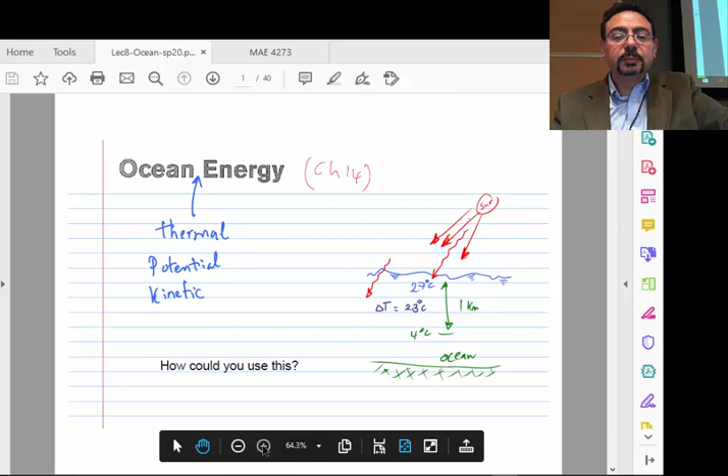So this is about ocean energy. The planet has a lot of oceans—it's a blue planet because of all the water that we got. And that ocean has three kinds of energy that we can harvest: thermal, potential, and kinetic energy. We'll see how people can use all those three to generate energy.

The problem with all those systems is the dollar per kilowatt hour. Those systems may be expensive unless you have special cases that make the price comparable to what you'd get from burning fuel.

So the first way is thermal. Where is the thermal coming from? It's coming from the fact that the sun is heating the top, and the bottom remains always cold because it's actually very dark too, since the radiation does not penetrate. As a result, you have a temperature difference. You don't have to go all the way to the bottom of the ocean to find this difference—within 1 kilometer, you could end up with a 27 to 4 degree difference.

So that's 23 degrees. As a mechanical engineer, anytime we see a temperature difference, what should we think about?

If I tell you the kitchen in our place is always very hot, like 80 degrees, and the rest of the restaurant is always like 65—so 85 in the kitchen and 65 in the rest—what should you do?

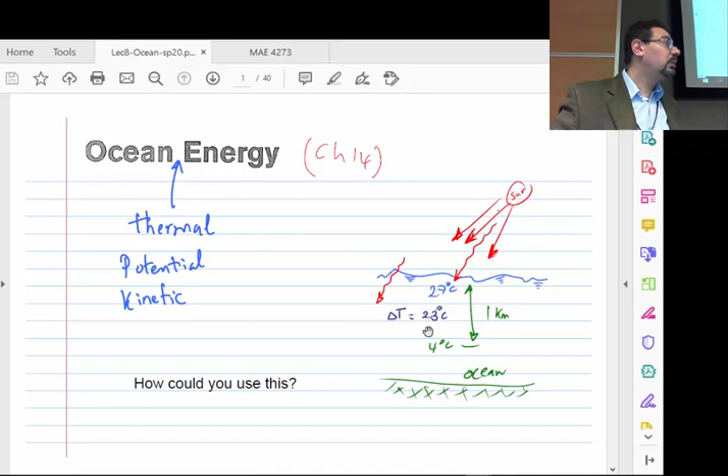If the ocean surface is 27 degrees hot and the bottom is 4 degrees, I could put a steam power plant in here, a Rankine cycle. This becomes basically ocean thermal energy conversion, OTEC. So in multiple choice, sometimes I'd ask, is this plant OTEC or a Rankine cycle—so you need to remember this acronym.

So now why does this sound like not really a great idea? You're like, no, I'm not gonna do this. Why does this sound unappealing? It's because the temperature difference is not much, and as a result, if you calculate the Rankine cycle versus the Carnot cycle—which is the best ever, we will never hit the Carnot cycle—that's 1 minus T cold over T hot. Based on the 20-degree difference we just calculated, that will end up being 7% maximum ever.

7% maximum ever—that's the Carnot cycle. So our cycle using the Rankine cycle will end up being what, 3%? That sounds horrible. But what is not horrible is that the 3% efficiency is running on free fuel, which is the sun, and it's always there.

Also what's nice is that there is a huge amount of water. This is not like just one pipeline of natural gas coming—no, you've got the whole ocean, so you can pull as much water per second as you want, as much hot water as you want. It will never finish. So if this thing is built on a really big scale, it can generate a lot of energy—yes, at 3%, but 3% of free energy.

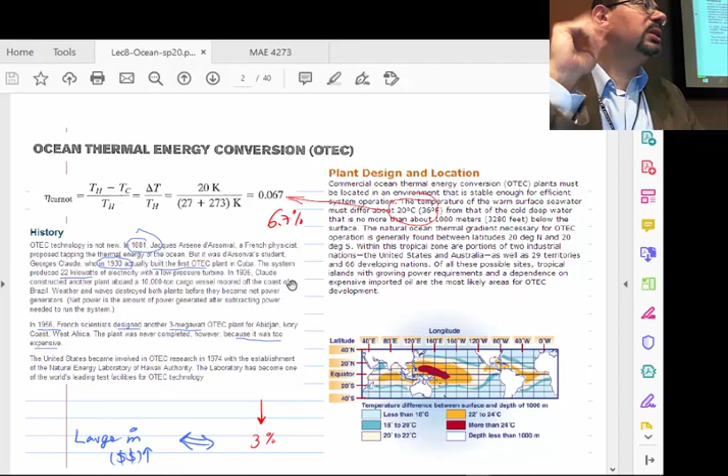So then the bottom line to judge this system is not the 3% efficiency. The bottom line is how cheap can we build such a system. Eventually, what is the dollar per kilowatt hour?

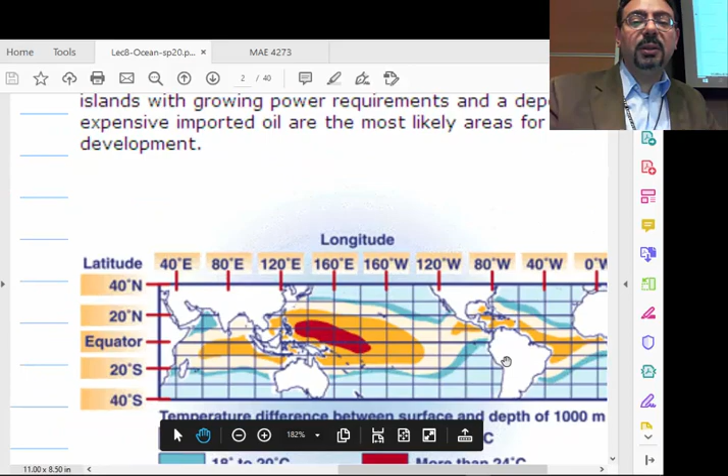Also, it requires 20 degrees C difference, and that doesn't happen everywhere. There are only a few places in the world where you will get that much difference, and you can see those places are near the equator, basically—because the sun is hottest there, so you can get that big difference. Those are more than 24 degrees C.

And that's why China contracted Lockheed Martin to run the calculation or the model for how they can build one of those stations near China, to harvest the energy. There was also an experimental one built in Africa by a French company.

Where's Africa? Over here.

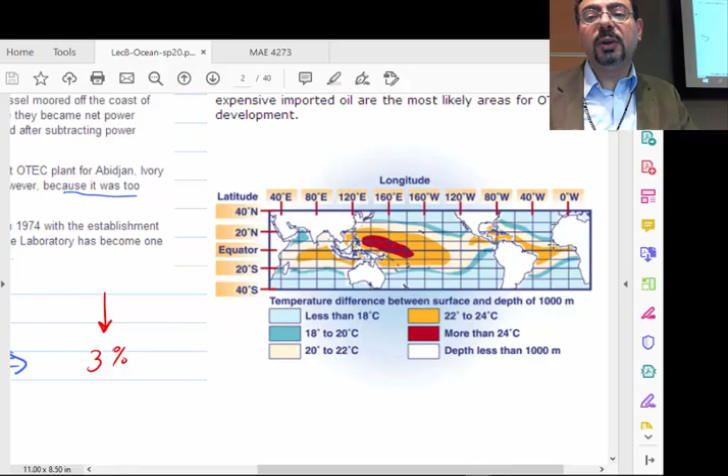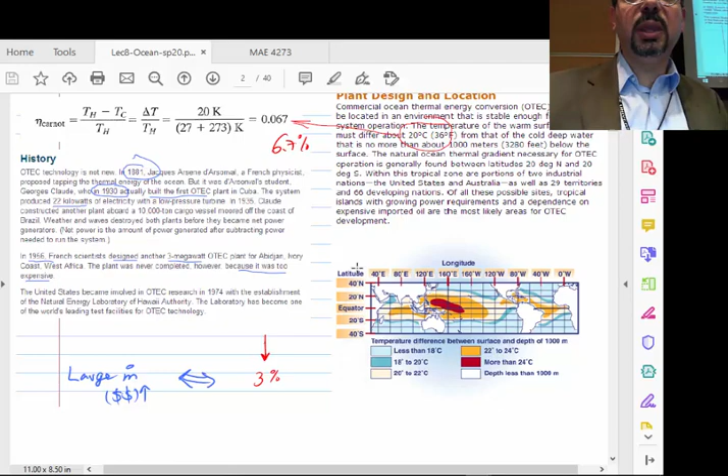So people are actually considering this seriously, right? But it's the cost per kilowatt hour, and also the fact that it's sitting in the ocean—you know how corrosive the water of the ocean is with all the salt—that makes the station basically live in very bad condition, which makes it short-lived.

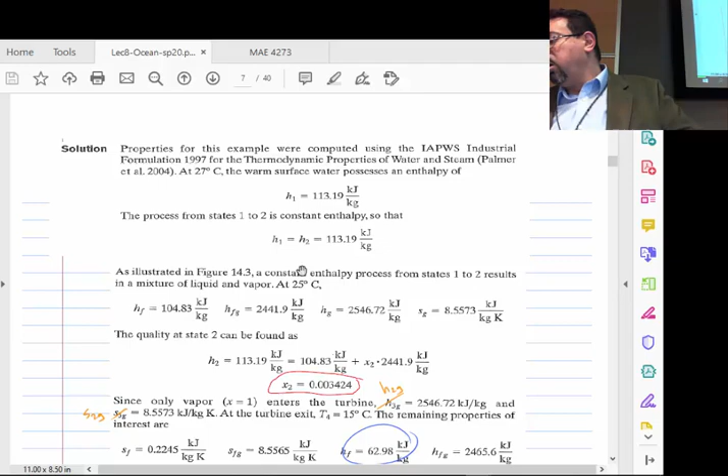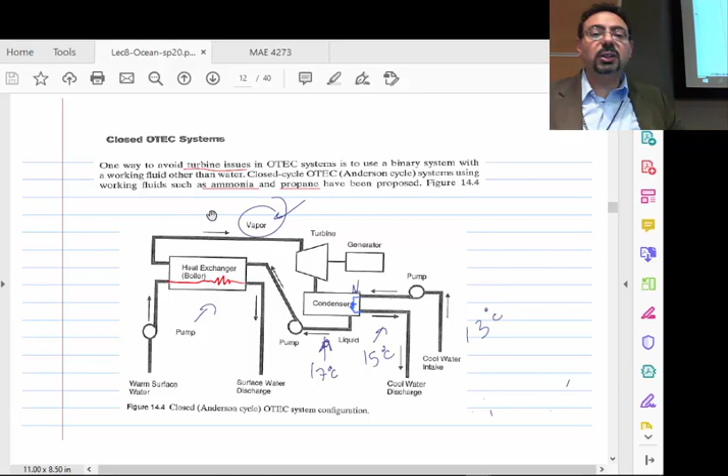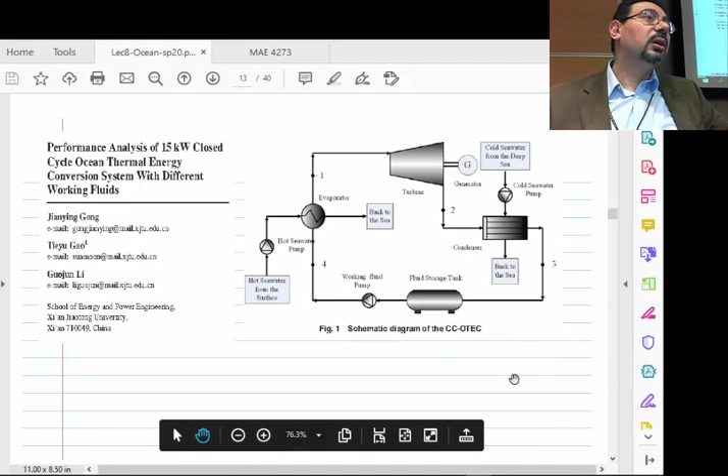What is a closed system? There is a working fluid here. That fluid could be propane, butane. There was a paper that said, if I want to build a 15 kilowatt closed system, what liquid should I use? It's not going to be steam, but it could be ammonia, butane, isobutane. They tried all those fluids, and for different pressures, they figured out the cycle efficiency.

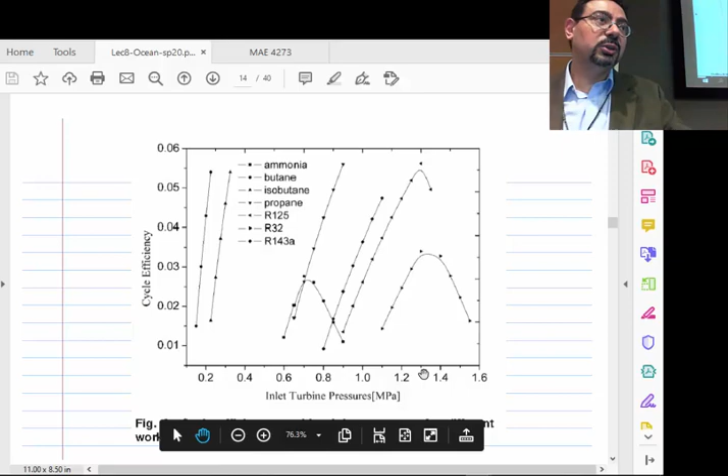You can see it's going from 1% to 5%. Yes, the temperature difference is small, but the point is that with different working fluids, you can run at different pressures. It would be nice to run at lower pressure rather than building things very heavy with big pipes to handle big pressure. So a closed system like this gives you the freedom to pick what thing I want to use—could be something toxic, since it doesn't really leave the system, I don't really care.

And so that Rankine cycle has a boiler, a turbine, a condenser, and a pump—that's the basic Rankine cycle, right? Does anyone remember the Rankine cycle?

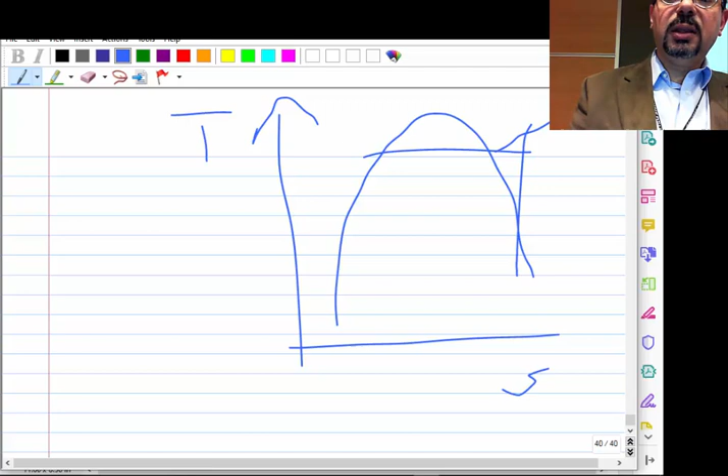So on a TS diagram, how does the Rankine cycle look? Here is the boiler pressure, and then it expands in the turbine, then cools in the condenser, and then you pump back to the boiler pressure where it basically goes again. Right? So, one.

Pen is not collaborating today.

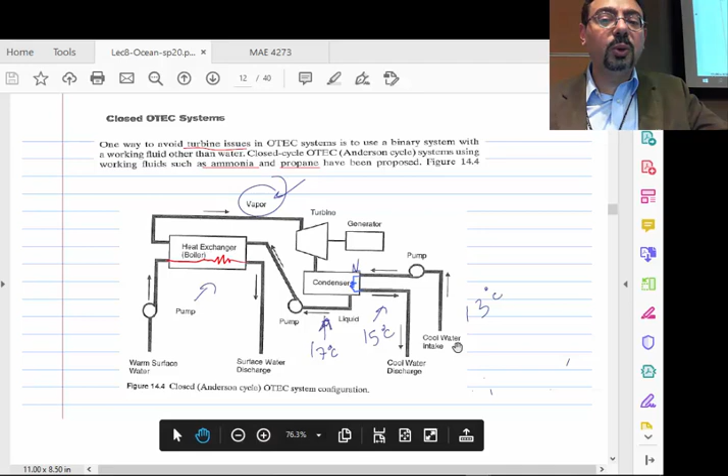But anyway, it goes from the boiler to the turbine to the condenser to the pump. The condenser and the boiler are simply two heat exchangers. One of them uses the hot water from the surface to heat our fluid, and the other uses the cold water from the bottom of the ocean to condense our vapor. Okay? So that is a closed system.

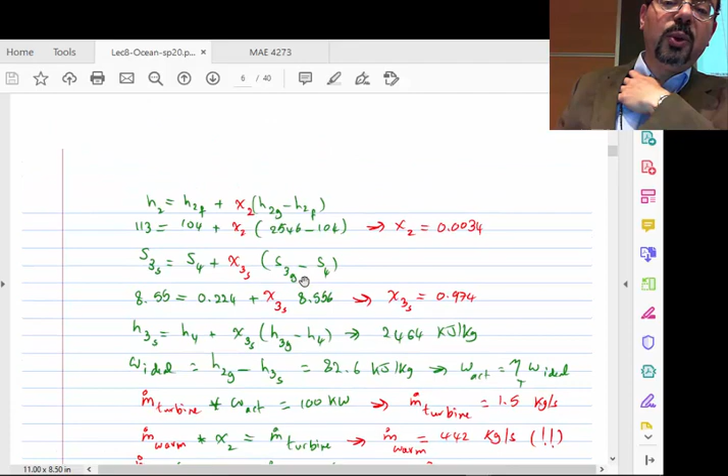Now the other, a little more complicated system, is the open system. What do you mean by open? We actually let the seawater go into our turbine. So how does this work? You get the warm seawater over here, and it's water. On a TS diagram, will it exist to the left or to the right? Where would water exist—liquid water? Left or the right? Left. It has to be here.

This is point 1, the incoming seawater. It's hot, 27 degrees—that's pretty good. But I don't use water in the turbine, I need steam. So they send this water into a flash chamber, or using a vacuum pump they reduce the pressure on it. So if you reduce the pressure on the water, what happens?

What happens when I open my Coke, which is under pressure? When I open it and suddenly the pressure drops, what happens? Gas comes out, it boils basically—well, in the case of Coke, it's the dissolved gas coming out. But for this scenario, if you reduce the pressure small enough, the water will boil. This process is called constant H—it's throttling, constant H, so H1 and H2 are the same.

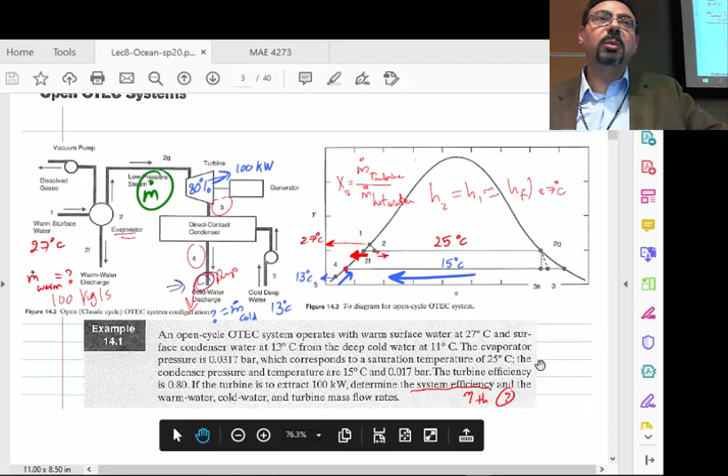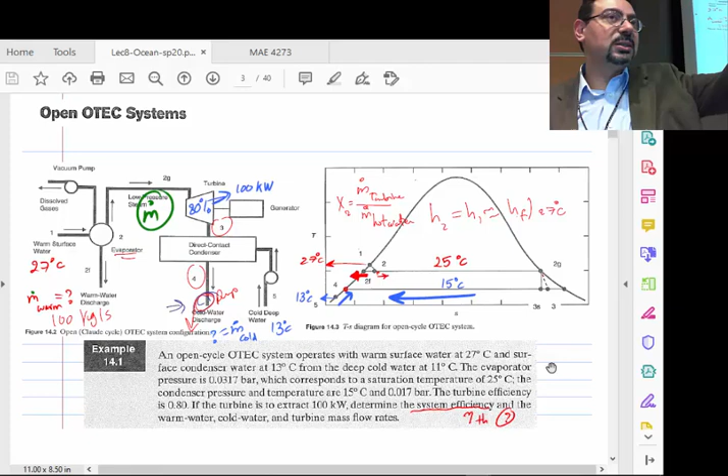So maybe that would be a homework problem: find the paper that managed to convince or turn an ocean thermal energy conversion system to operate at a temperature difference more than what's available. How do you do this? Because that is obviously a bottleneck in that system.

So what are the two equations we need in that system to solve it? We need to know that H1 equals H2, throttling. Okay, so everyone remember H1 equals H2. And the m dot going to the turbine is X2 multiplied by m dot 1.

So how do I calculate X2? See, this is by definition: X2 is m dot turbine over m dot hot water. Now how can I calculate X2 so that I can calculate m dot turbine from it? Can anyone help? How can I calculate H2?

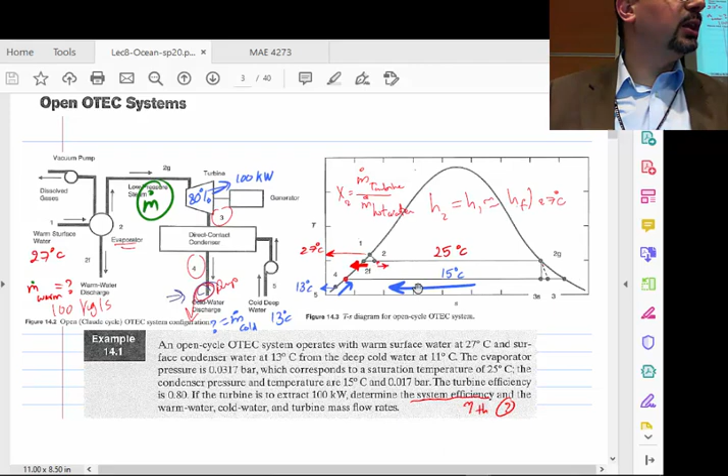Sorry, X2. How do you calculate the quality? Enthalpy, how? You compare the H2 with the HG and HF, right? So basically, it doesn't work out.

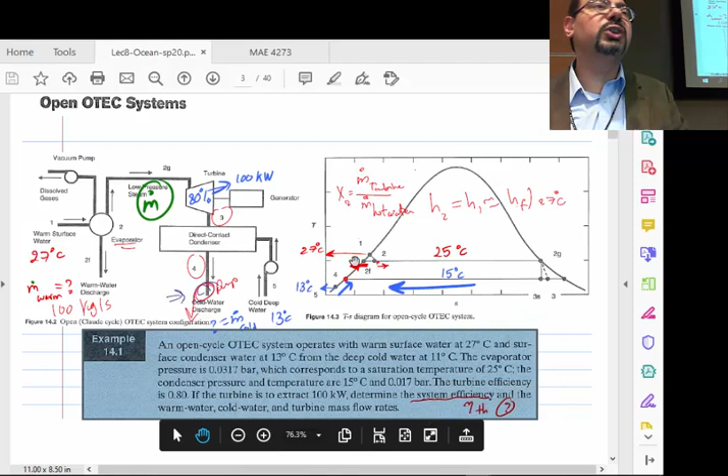So Eric is saying the X2 should be H2 minus HF divided by the whole thing divided by... HF, HG minus HF, and in some books they call it HFG. So basically, that equation is saying this much divided by this much is our X2, right?

So H2 minus HF divided by HG minus HF, that will be your quality, and from that you will be able to calculate m dot, right?

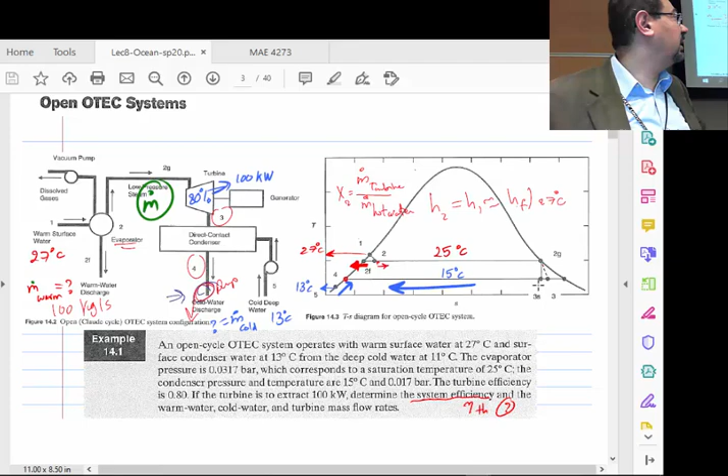The other part we need to worry about is that in order to calculate the work of the turbine, it should be H2G minus H. It should be H3, not H3S. But H3S is the easiest to find because it has the same...

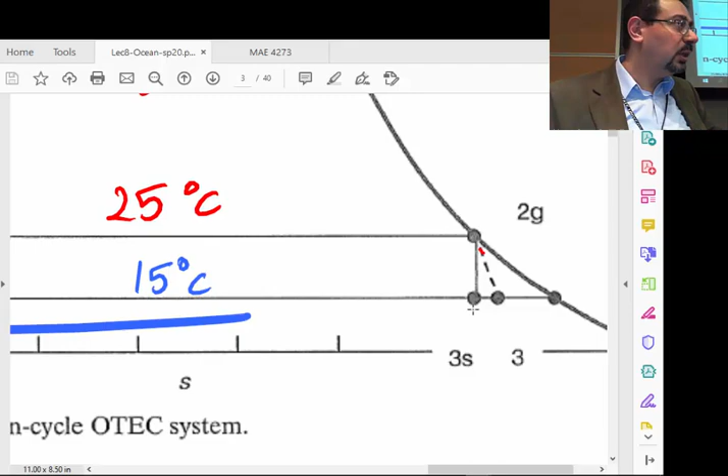S like H2G. So once you are here and you got your H2G from the table, the same table, you would say that entropy is the same as that entropy. And once you have that entropy, then you know its quality from the same equation.

What equation? If I want X3S, what should I do? This S minus that S divided by the total S. You get the quality over here.

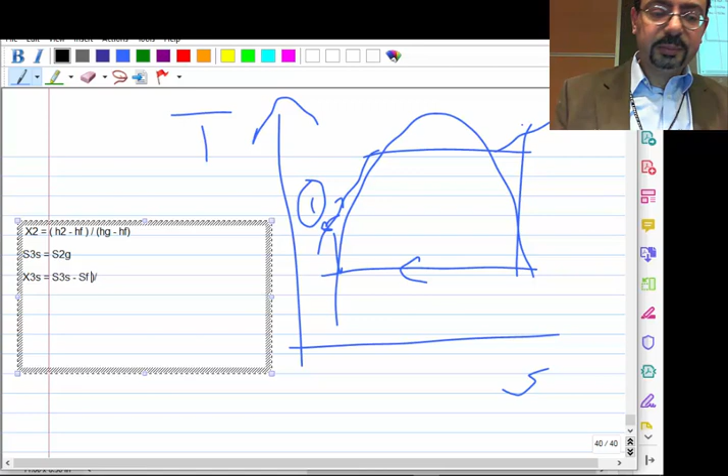So you can get S3S, I guess, that is going to be equal to S2G, and from that you can get X3S from the S3S minus SF, the whole thing divided by SFG. Okay, now once you know the quality, you can get the enthalpy of 3S from HF plus X3S multiplied by HFG.

Make sense? So I'm saying the quality, you will get it from saying this S is the same S, I got the S here, S minus S divided by the total S at those two temperatures will give you the quality. Once you have the quality, you can get the H exactly the same way. The H here is the HF plus X multiplied by HFG.

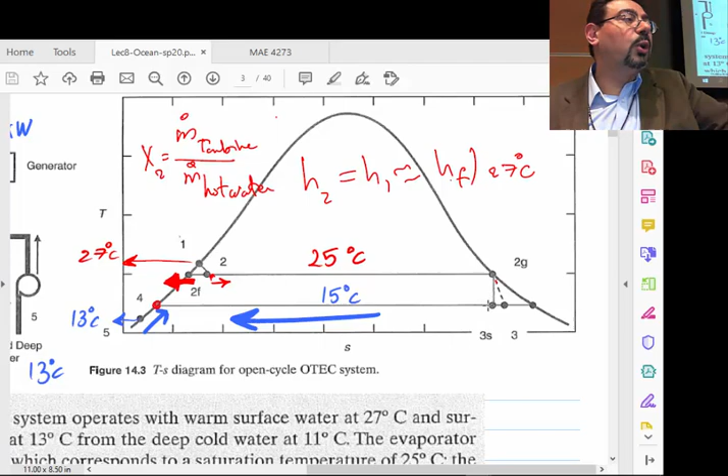So now this will allow you to calculate the work ideal. This H minus this H. The work actual is smaller by how much?

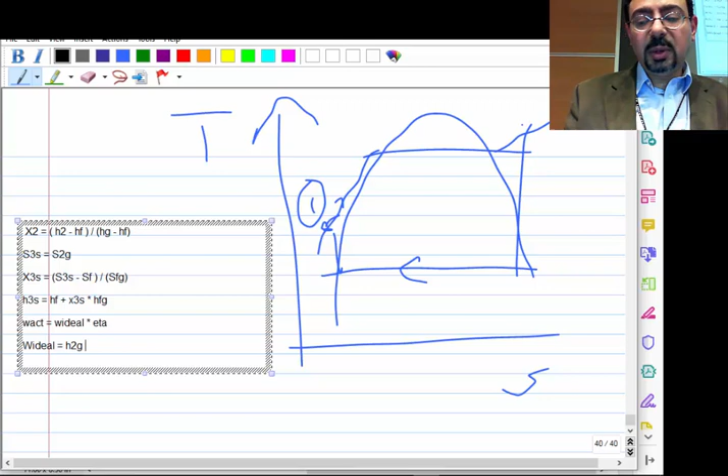By the isentropic efficiency. So one could say that the work actual is going to be the work ideal multiplied by eta, the isentropic efficiency of the turbine, and that work ideal is going to be H2G minus H3S.

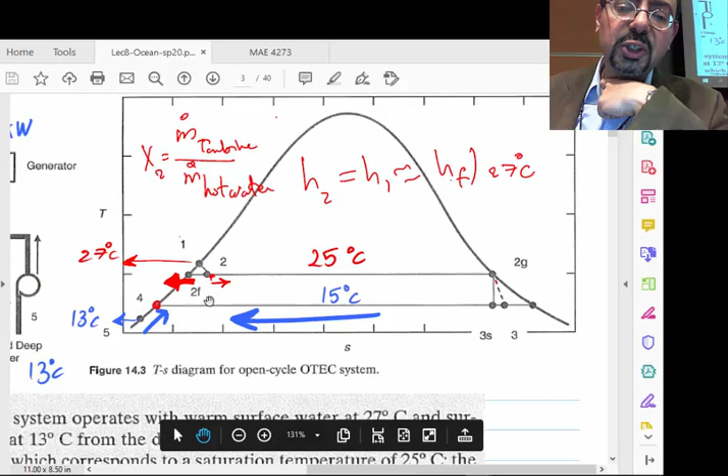H2G minus H3S. So you got work ideal, you multiply by an efficiency and it becomes a little bit smaller, and you will get this H in case you want to know how much heat transfer is going through the condenser. So in this example he said determine the system efficiency, the warm water and cold water, and the turbine mass flow rate.

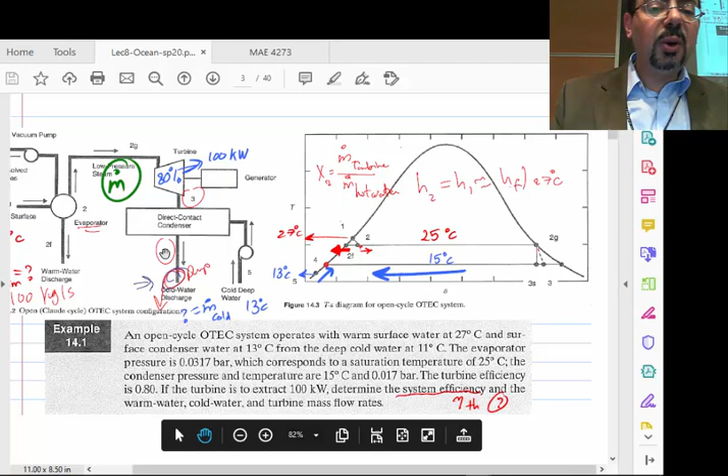So because he wants to know how much cold water is coming and how much hot water is coming, you need to know those Q's. You need to know how much Q dot is going into the condenser too.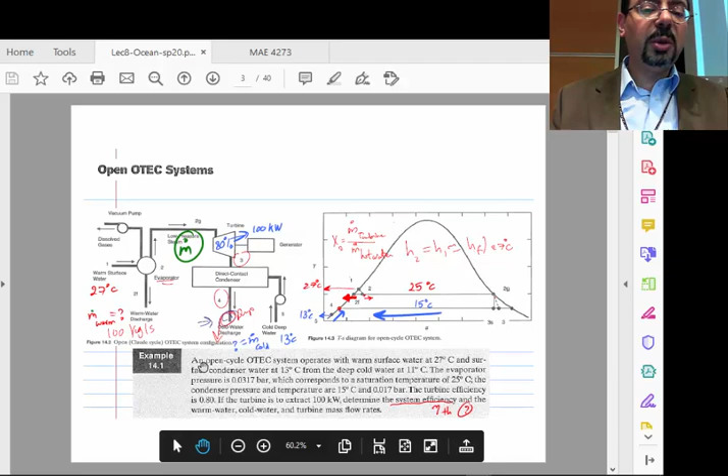Now the condenser, there are two kinds of condenser used in this system. There is a closed loop condenser, and there is what they call an direct contact condenser, where they spray the water into the incoming cold water.

So you need to apply the first law of thermodynamics to find out how much M dot cold water is coming. The bottom line is that when the steam is going from 3 to 4, the cold water is coming from 5 to 4.

This much heat lost from the steam is going to be gained by the cold water. So M dot steam multiplied by H3 minus H4 is equal to M dot cold water times H4 minus H5. That's how you calculate M dot cold water.

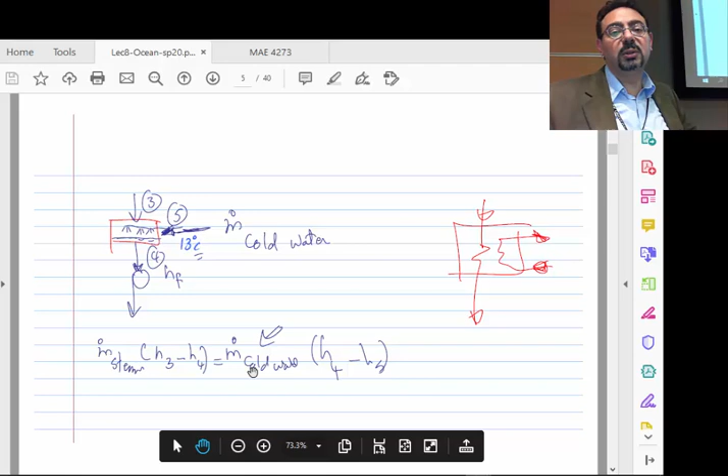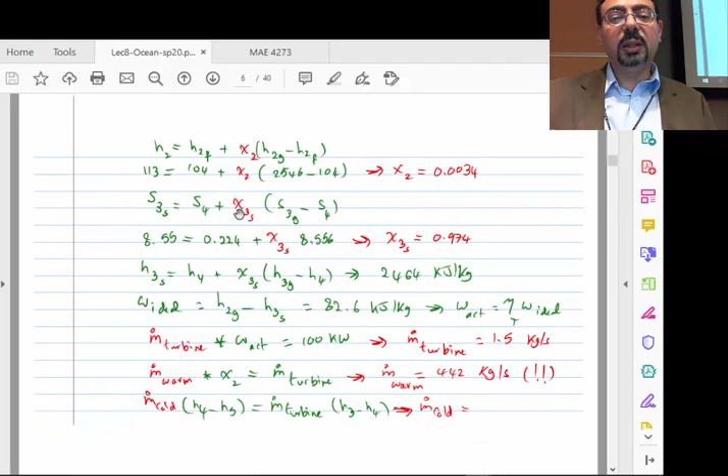Does this make sense? Q dot equals Q dot. Whatever you lose from here is gained over there. The whole solution is written for you over here with the numbers.

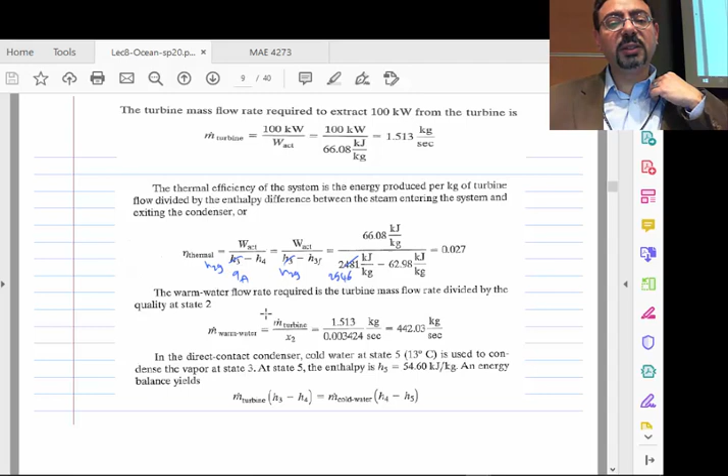The book had a wrong number here, but I fixed it for you so you can read this at home and see how he calculates M dot water, both M dot cold water and M dot hot water.

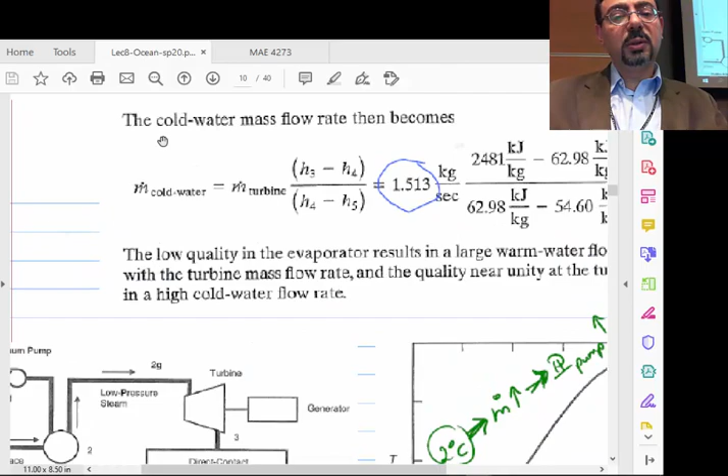This is the equation that we just wrote: M dot cold water multiplied by H4 minus H5 equals M dot steam times H3 minus H4. Steam is doing 3 to 4 while the cold water is doing 5 to 4.

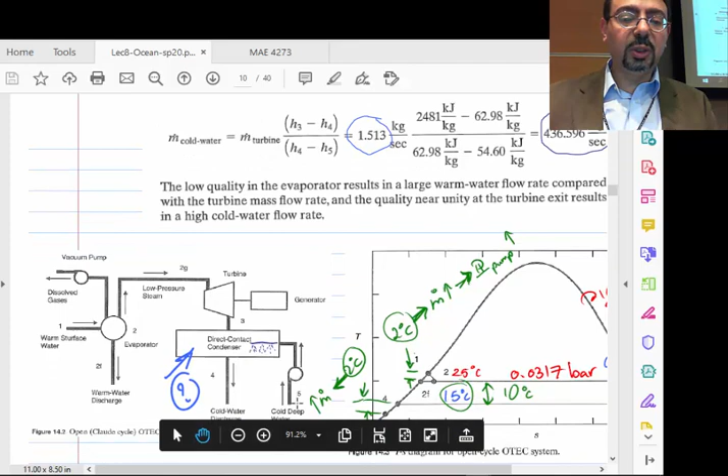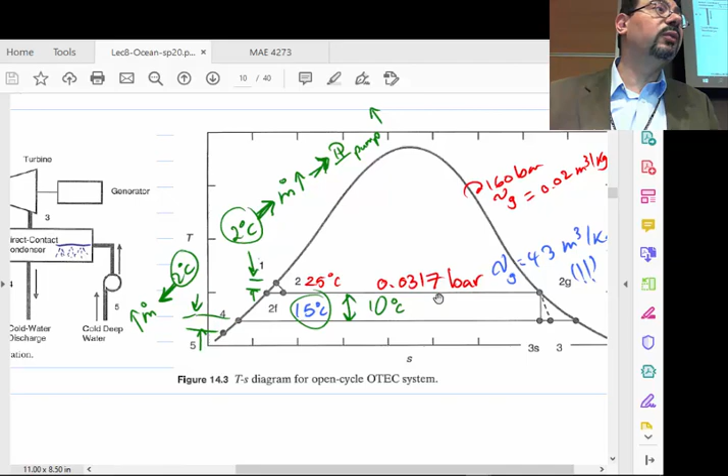I think really the hardest part is this flashing thing, how H1 equals H2, and how we can calculate M dot steam out of this quality two. But the rest is a simple Rankine cycle that you guys did before, and we know what's the efficiency, right?

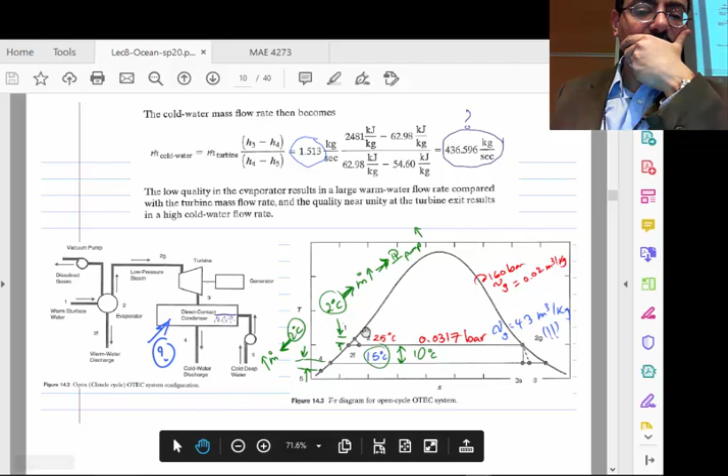What's the efficiency? If I said what's the efficiency of the system, how do you calculate that? Work net divided by Q added, right? So what is Q added in that system? What will be Q added?

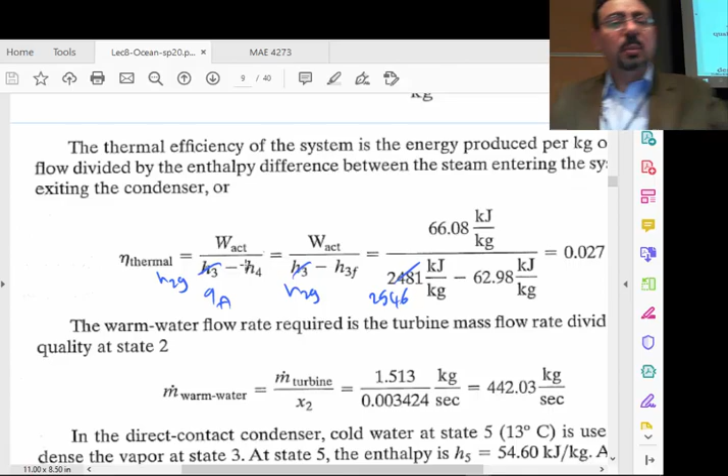So work actual is basically the work turbine, right? Minus what? Minus this vacuum pump work, minus this cold water pump work, right?

You will see that he will actually neglect those, and he's right in neglecting them because the pump work is very tiny compared to the turbine work. Same thing over here. So he will neglect those guys, and throughout this chapter he will think the work net is mainly the turbine, forgetting about the pumping work.

So I'm also saying that you need another pump over here. That pump is the one, because the turbine is under vacuum, or the exit of the turbine and the condenser is under vacuum. Then you need a pump over here.

But again, this pumping work is very little. It takes very little energy to pump water. This one is taking you from vacuum almost to seawater or atmospheric pressure. But you will not see all those guys in the calculation—you will basically just neglect them.

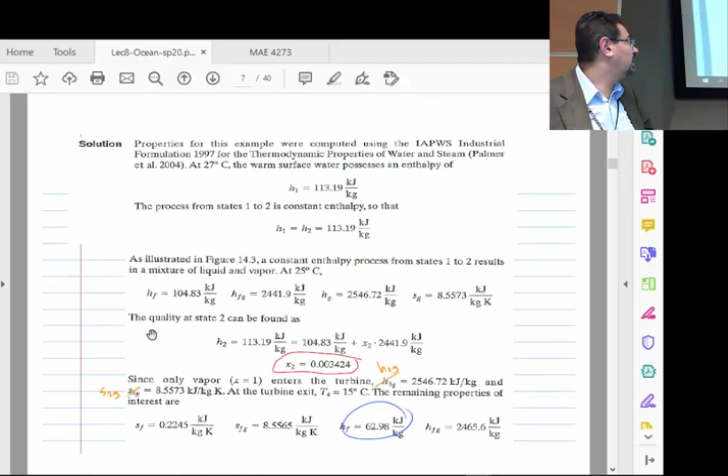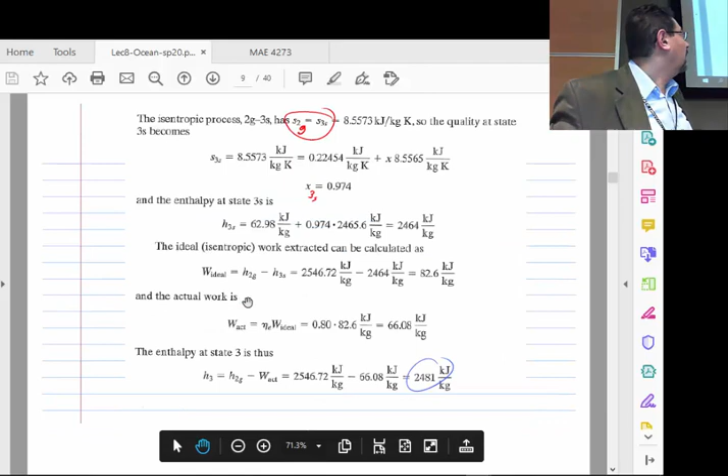And then the question is, what is the Q added? So he's saying H3 minus H4. But when you do H3 minus H4, that is not Q added. Okay?

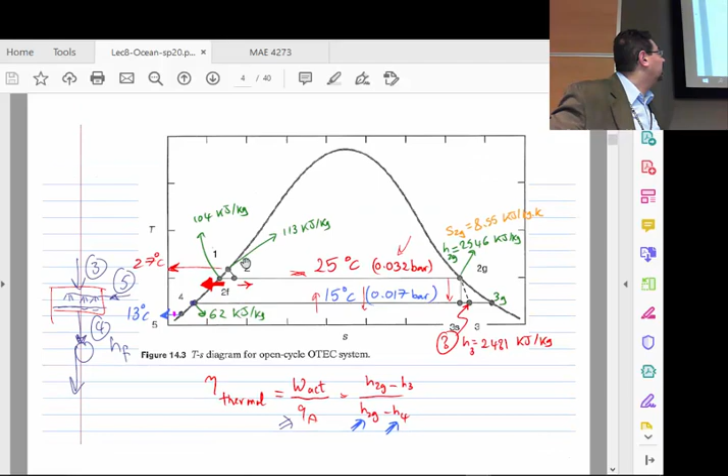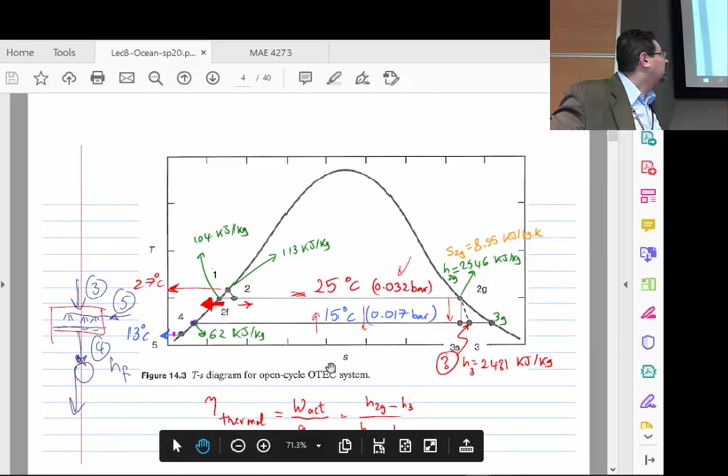So it should be H2G minus H4. That's what we deliver to the system. We give him basically H2G, and we receive it from him at H4. So this is how much energy we give to him, and this is how much work we are getting from him. Does this make sense?

So think of it like we give you back the H at 4, and you give it to us, to the turbine, as H2G. From here to here, I'm looking at this and thinking this is my boiler. I give you the water at 4 and you bring it back to me at 2G. So that is the Q added.

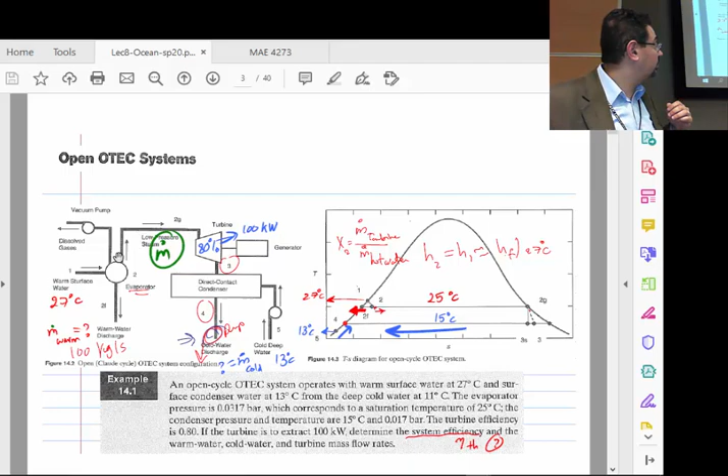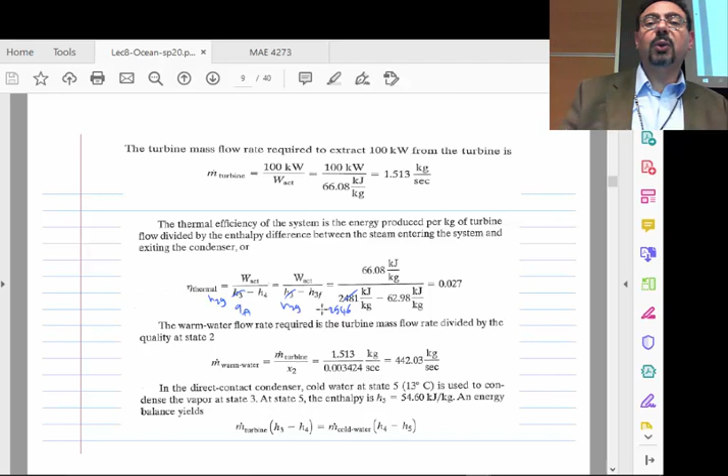And especially since this part of the cycle requires the same m dot as the m dot going to the turbine, it makes sense that m dot is cancelled—because it's the same m dot going through the turbine and through the boiler. When you read this back at home, it will make absolute sense.